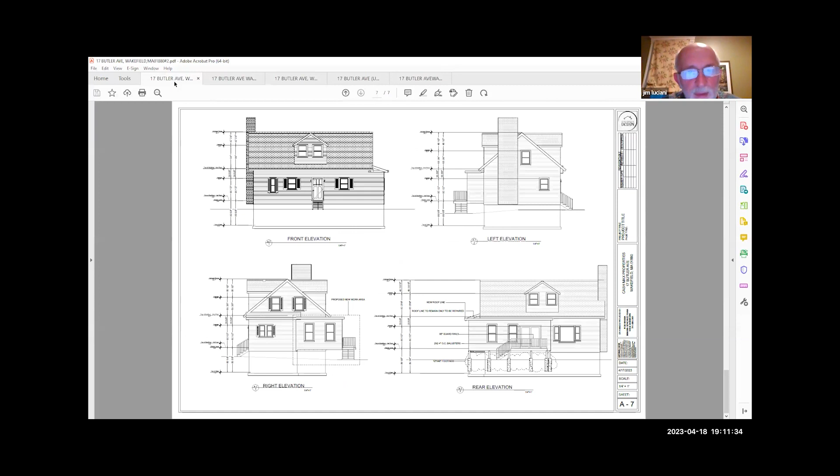Ken, can you go back to that picture you just showed? The profiles, elevations — let me look at that for a second. Okay, thank you.

All right, again, so there is no file number and the applicant is not here at this point. There are no other questions or comments. We can move on. And did the plan show the resource area?

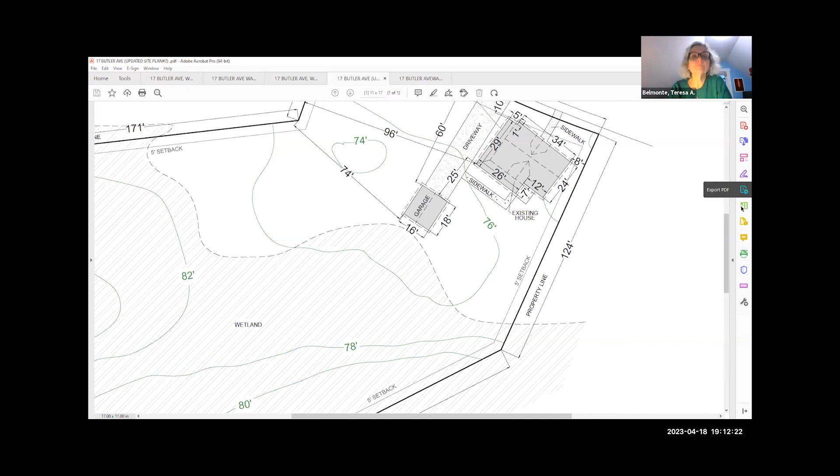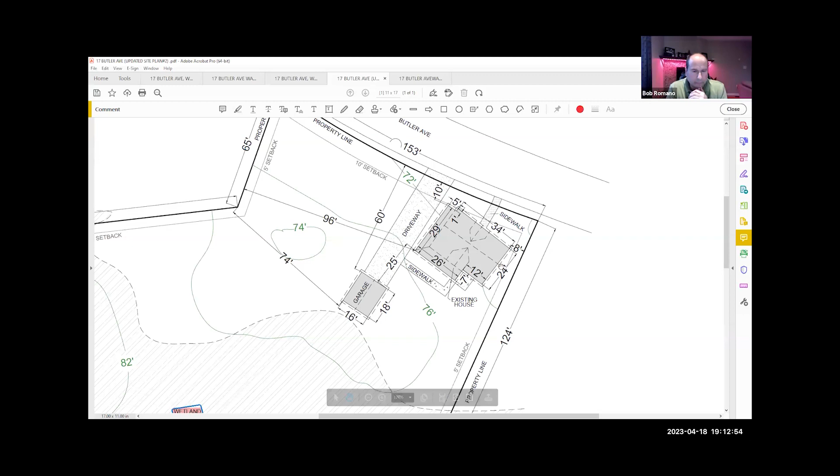Good question. Yes. It's pretty tight to the back of the garage. There is an existing fence that drops off fairly substantially at that point too, behind the garage. Yeah, this lot is quite elevated compared to the two adjacent lots — there's maybe 5 to 6 feet difference in elevation between either side. So there's a noticeable drop off in the back where the wetlands are located. It's pretty easily defined.

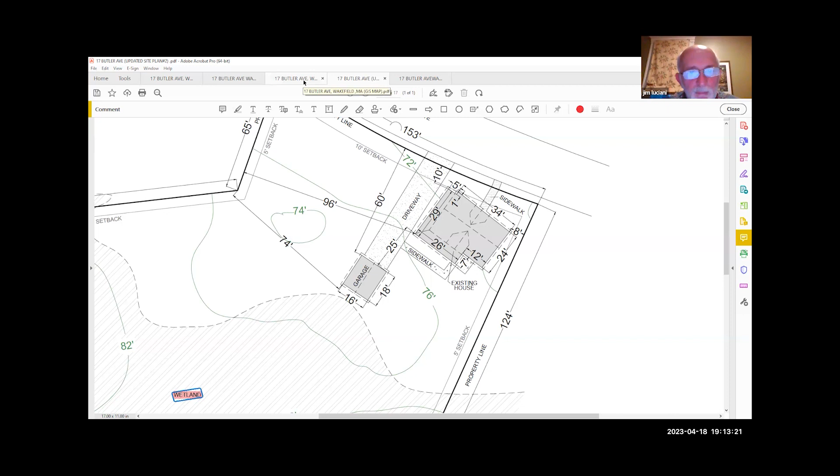Okay. Any other questions regarding 17 Butler Ave?

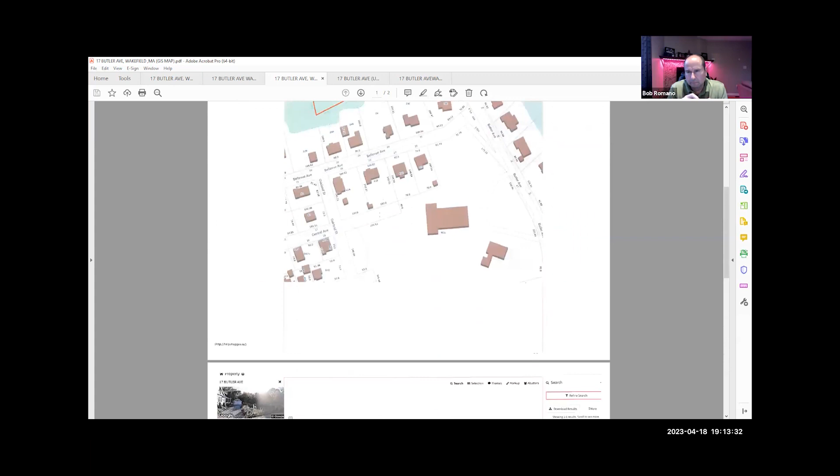Okay, alright. So again, we are waiting for a file number for that.

Alright, next up, we've got about a minute before we can kick off the next thing. Do you want to tackle 51 Eunice tree removal real quick? That should be fast. I submitted a picture to you guys. The tree is within your jurisdiction, but probably somewhere around that 50-foot mark. It's right behind a fence and it's deader than a doornail.

Yeah, what was that address again? I'm looking for the email. 51 Eunice. Ken, do you have that one readily available? Yeah, it's on the screen. Oh sorry, I'm looking through my email for it.

Is there a snag possibility? That was the only photo of it, right Rebecca? Yeah, that's the only photo. It's got multiple trunks. I don't remember looking at it with a snag possibility, but I can certainly revisit that. It's in the woods, so it shouldn't be an eyesore because there's enough stuff growing up about 7 or 8 feet.

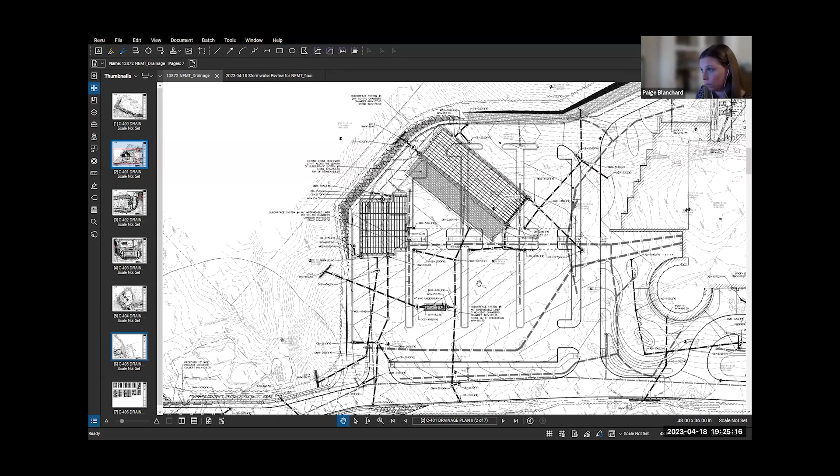So all of the systems still provide the same amount of treatment, which is the water quality structure, and then the isolator row. That is the same approach for both the systems that infiltrate. We've just expanded these systems, so really that's the main change we've been working on with the engineering department. The majority of the rest of the site hasn't changed, so that's really all we wanted to highlight. It's just really that we've worked to reduce all of these volumes to alleviate any concerns.

And I think I can turn it back over to Julie with that.

Thank you, Paige. So the only thing left for us to do, I don't know if the commission members have had the opportunity to see the engineering department's memo from this afternoon, but we're happy to go through that as needed to address any comments further beyond what's in the memo. So if you have any questions specifically, or would you prefer we just proceed through the memo?

Yeah, I don't know that all of us have actually seen that memo yet, so it would be great to go through it. Not sure, would it make sense for Bill to go through those comments? There he is, I am here. Yeah, I could, or Julie, if you want to go through it, if you have it. I don't want to put Bill on the spot, I don't have it in front of me, so you're more than welcome to go ahead of it.

Thanks, we're prepared to do that. And I'd be happy to answer any questions that you have on it, though, for sure. Certainly, feel free to leap in, Bill, as needed. We appreciate that. So Paige, if you have that document, do you want to just go through it and let us know when you have any questions on any particular issues?

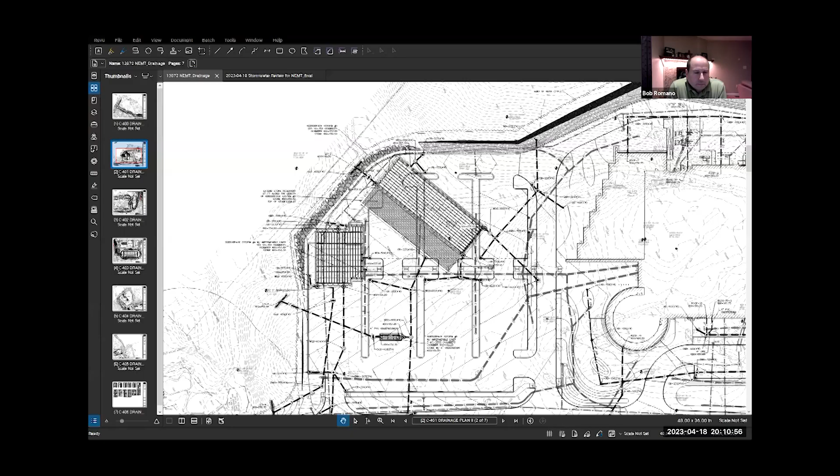Bob? The question I have is, you mentioned earlier in your statement that you were going to mitigate the volume to the discharge area to the town wetlands on town property. Do you have an amount, what the volume is to be discharged now or anticipated what it would be?

Yep, that's all provided in the stormwater report. I don't have those numbers off the top of my head, but we are reducing the volumes and rates. Okay, yeah, but they're in the report. Can I find that report?

Yes, we will. There's a version that should be public right now, but we are based off of this update here for this system. We're going to provide an updated report with those numbers.

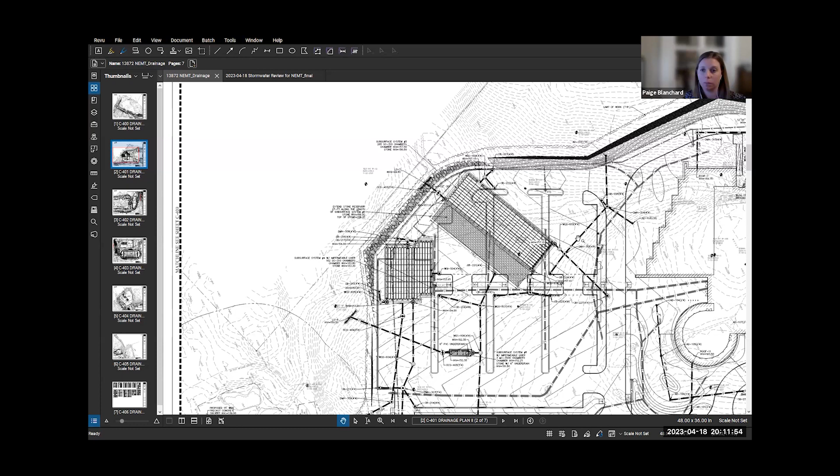Is that the discharge tube that's up there, kind of dark black? Yes, there's two discharges, one here and one here, and they're both going out to town land. Correct. That brings me to another question that Bill Renault, the town engineer, may handle.

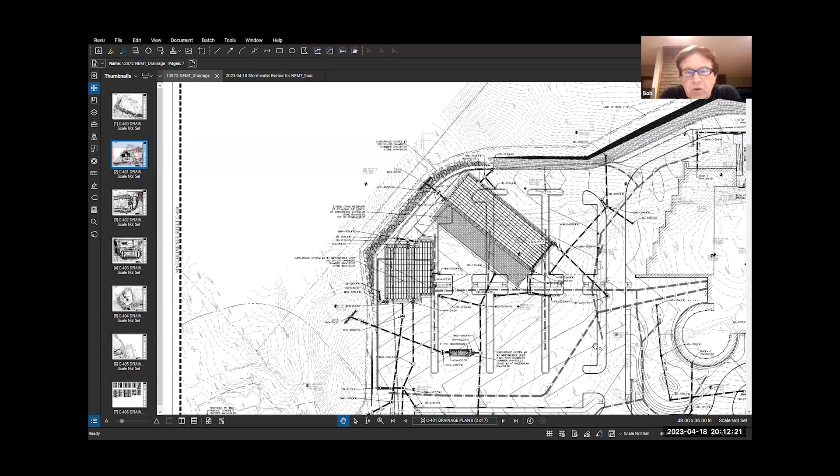He was out in that area with Tim several weeks ago and saw the elevation of my house. Because my house is built on ledge and rock, I'm very concerned about the water that comes out there and could come through my foundation. In the last storm we had 2.5 inches and my sump pump was on for 4.5 days on and off. We know the elevation from the wetlands is higher at my house than my neighbor's, which is directly behind it.

Did you have any comments on that, Bill, or how would that affect things? Yeah, so we had separate analysis points all along the back. We looked at the wetlands that are there, and also at what would go towards Stone Way, so we had them look at all of these different areas.

Originally what they were doing is concentrating all the flow to wetland 1, basically routing it all there. This now spreads it out, but it adds infiltration so that you're overflowing to match what already leaves and goes there today. In my opinion this is a better design, so it mimics the natural flow of water that gets there.

Granted, it's a little bit more concentrated, but it's going to the wetlands, so it would get there anyway. If this wasn't built, it'd be getting there to the same wetland, so it's going to operate the same as it would.

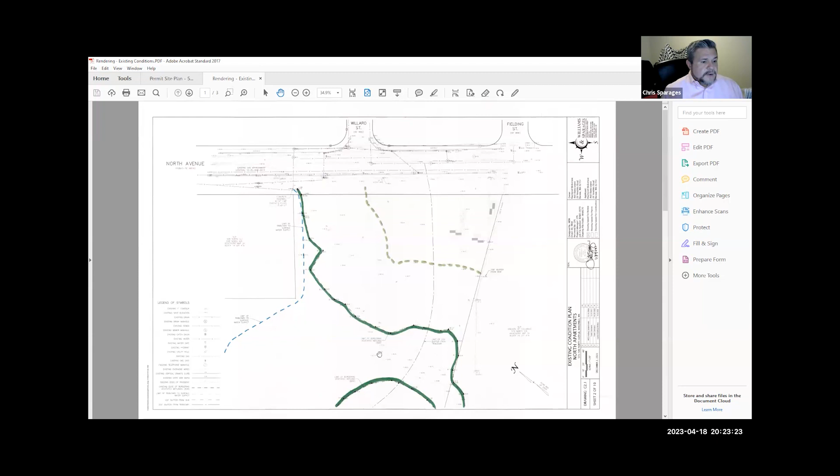We're here before the commission tonight because a portion of our property is located within the buffer zone of a bordering vegetative wetland. Our wetland system borders on a stream that runs through the middle of the property, starting from the southwest area where the MBTA line is located. There's a railroad track and a culvert that discharges at the railroad tracks. This is an intermittent stream that runs through the property and then into a 36-inch corrugated metal pipe right at North Avenue, and then continues on to Lake Quannapowitt.

If we zoom out and show the permit plan set again, you can see Lake Quannapowitt off in the distance. That pipe enters the street drainage system of North Avenue down Willard Street, and then eventually discharges to Lake Quannapowitt.

There were two wetland series, the A series and the B series, and we are not proposing any work on the back part of this property at all. All of our work is proposed within this area here to the northeast.

One of the first things we looked at on the project, we knew there was a stream that ran through the project, and it's been the subject of some questions from Rebecca in the Concom office during our permitting process with the Zoning Board of Appeals.

I'll go into that in a bit more detail, but just so folks are aware, this is a project that was submitted as a comprehensive permit application with the Zoning Board of Appeals. We went through a very thorough review process with all the departments, including the Conservation Department, which definitely had input during the process with the Zoning Board of Appeals.

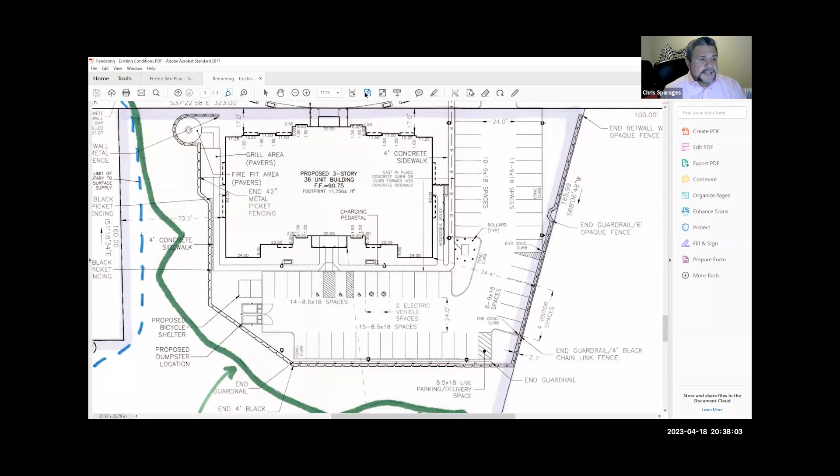They're laid out on our layout plan. We don't have a lot of places for snow storage on the property, just in some of the landscaped areas and this large triangular shaped area near the entrance here. So if it snows pretty heavy and we get a couple of storms in a row, we're looking at taking snow off the site. That was a topic of discussion when we were in front of the ZBA as well.

We have fencing along the perimeter as well. That fencing is for safety and also will do a good job at protecting windblown litter from ending up in the wetland down below.

We also have designed a lighting plan. Having reviewed the other projects during the early stages of this, we tried not to recreate the wheel. We took a look at the orders of condition for 598 and 600 to see the kinds of special conditions that might be important to the commission.

We know that lighting and overspill is something you folks are concerned about. When we design our lighting plans, in this case we have 9 light poles spread throughout the site. We limit the degree Kelvin to 3000, keeping the light color within that warm white range with the LED lights. Once you get close to 4000 and 5000 degree Kelvin, you get that blue light that's not pleasing to the eye, and if it's not pleasing to us, it's also not pleasing to little critters. So we did think about that as we designed it.

I'd say the most important aspect of the project we designed is the stormwater management system, and it's fairly simple. We're collecting stormwater runoff in the parking field in a couple of catch basins and a trench drain along North Ave. Any rainwater that touches the pavement will go through either the trench drain or the 2 catch basins and then run through one of 2 pre-treatment devices. These are proprietary treatment devices we've designed to make sure we get more than 44% TSS removal before ultimate discharge to our main BMP.

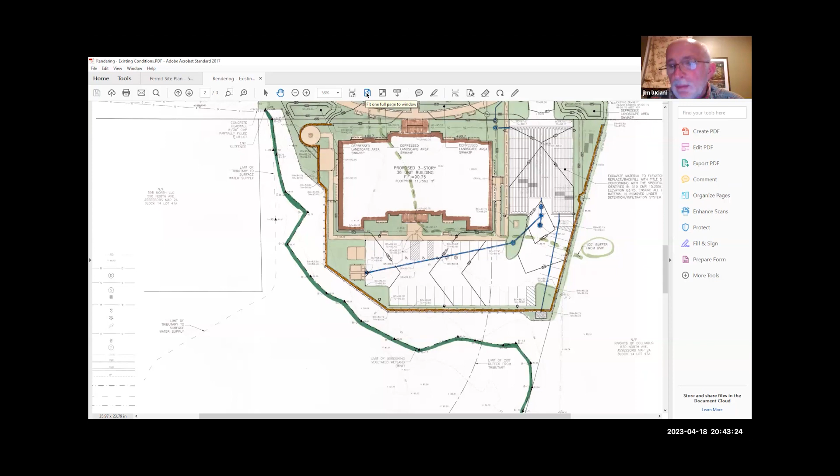Sure, let me go to this plan here. So this is the thread, this will be the thread of the stream, and we did locate a bank, but it all lies within the wetland area, so we didn't show it on the plan. It's all inside the wetland line. Okay, so in other words, there's no bank outside the wetland line. Right.

But is there a width to the channel that is the stream? So there is. It's very much underwater during certain times of the year. This is a very big wetland area.

Let me stop sharing for a second. I have another screen that I can show you that does a good job of showing that, so you can get a feel for it. It won't take very long. Let me share my screen again.

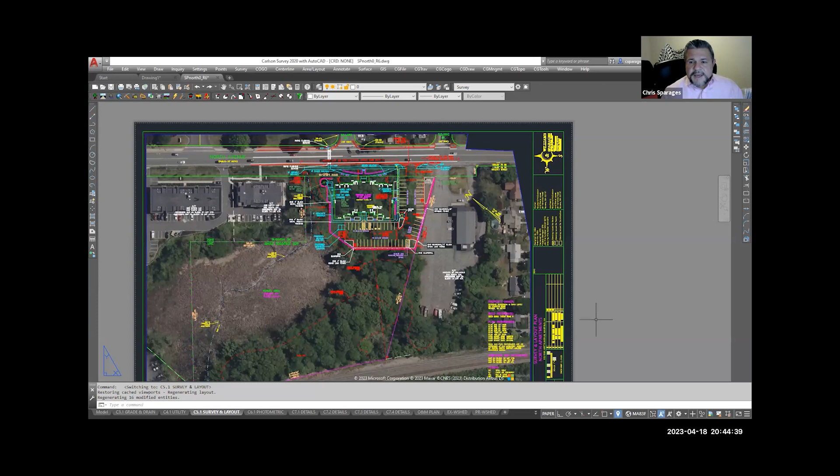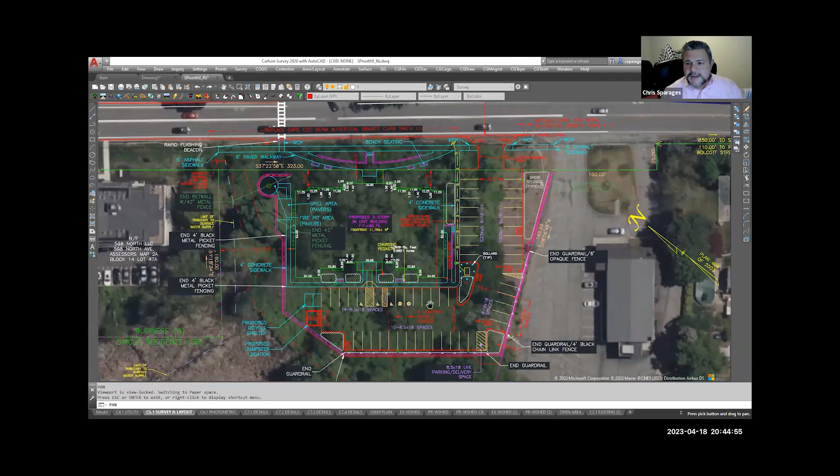Can everybody see this screen? Yes. So this is my CAD program. It's unusual to see these things in different colors, but you can see the building here is in this green color, and the parking field is here, and this is an accurate, current aerial overlay.

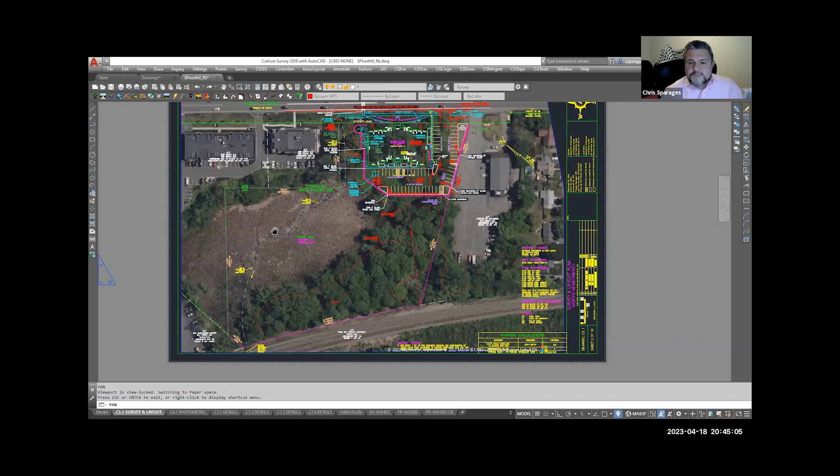You can see the stream, how it comes out of that pipe underneath the MBTA tracks and comes through the property, and you can see the thread. So Jim, there definitely is a width to that, but you can't really get out here.

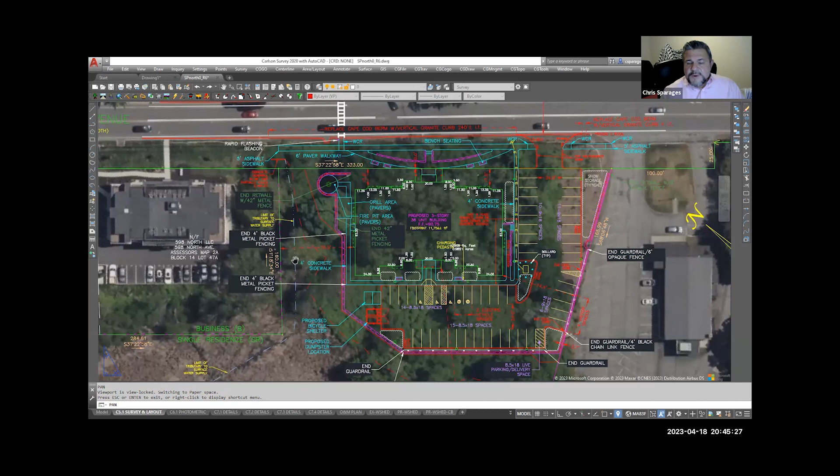I was more interested in the area between the two buildings. I see. So we do have some bank flags on our side, but we didn't bother getting the other side. I know the plan for 598, which I think I have a copy of, does show it on that side.

But we didn't bother showing it on the plan because the wetland is uphill a bit. Okay, let me finish up quickly here, going back to the plan. So the other item Rebecca really had a lot of questions and comments on had to do with how close we're proposing this project to the wetland edge.

We recognize that the commission has a policy, the tree removal policy, and the 25-foot policy. We asked for waivers from both of those local requirements when we applied for our comprehensive permit. Those waivers were granted by the zoning board of appeals, in their capacity as the approving authority for the comp permit. But we do have some areas where we're less than 25.

We try to do our best. Out in this area here, we do a good job of staying more than 25, but once we start coming around here, we get as close as 15 feet. We chose that as our limit based on the previous approval for the 598 project right next door. They had some similar areas where the commission was willing to allow activity as close as 15.

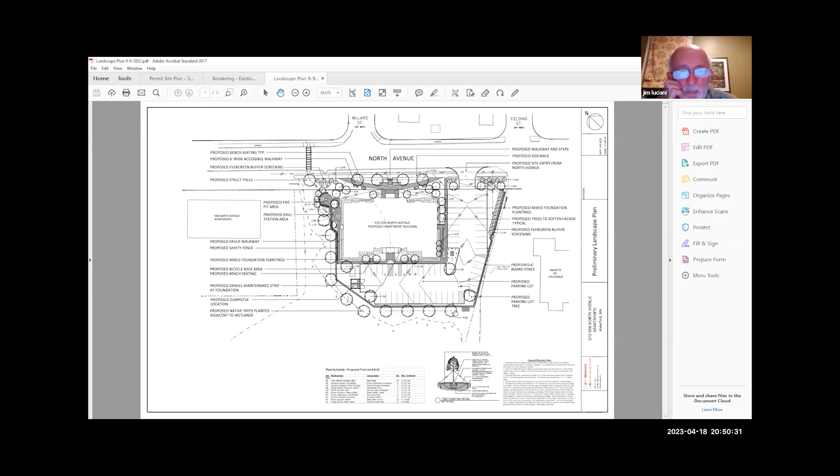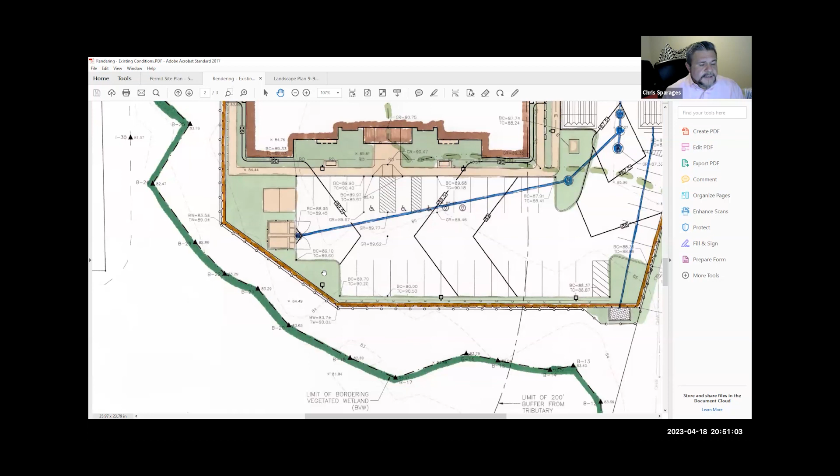What's the elevation difference between the wetland and your parking lot? That's a good question, let's zoom in and take a look. Wetland flag elevations down here are roughly elevation 83 to 84, right in that range. And then up on top, it's a little bit of a sloping thing, 89, 88. So about 6 feet or so.

So the closest point to the wetland is approximately 15 feet, but your actual limit of work line is going to be somewhat closer than that. Are you talking about the silt fence line or the trees we'd like to plant? Okay, so the fence is identified, I see it. So that's where I'm measuring my setbacks to.

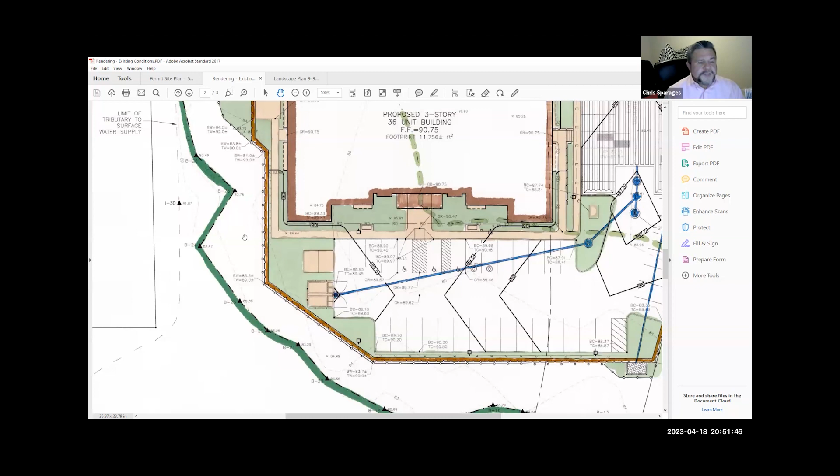What was that circular structure up by the upper left-hand side? A fire pit. That's correct.

Could you put the 25-foot buffer zone on the plan as well? Yes. I would say throughout. Yeah, exactly.

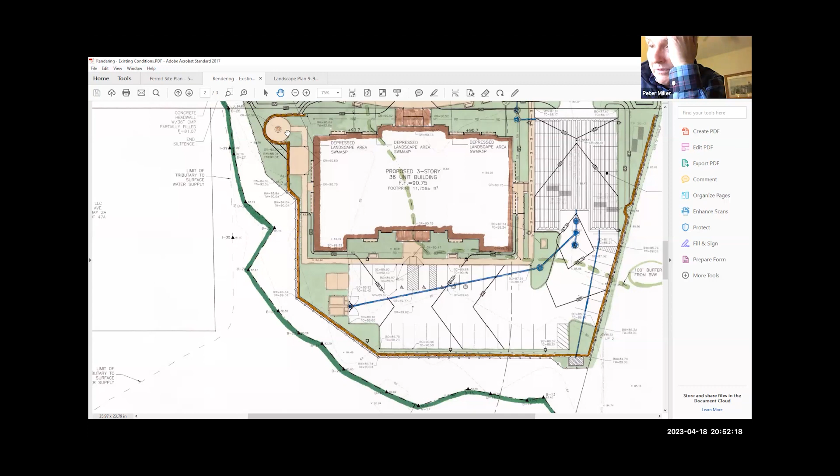And does this mean there is no ANRAD? That's something we would have to evaluate, right? We would have to. Yes, we've asked the commission as part of the notice of intent to confirm the wetland line as shown on the plan, so we would need to do that as an initial matter.

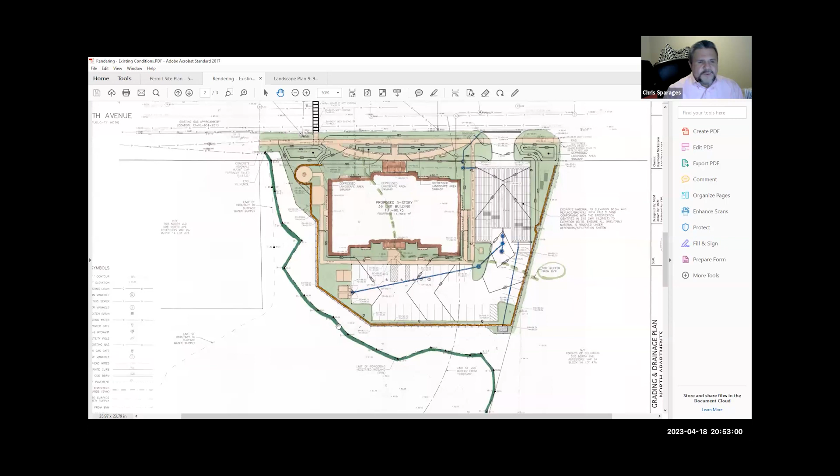Normally we would come in with an ANRAD, but this one, it always works out this way, right? This one's so straightforward. Greg Hockmuth from our office flagged this wetland, it's a toe slope wetland. I asked Greg what he thought, should we go in for an ANRAD? The stream doesn't even show on the USGS map, and the wetland's pretty straightforward. He said he wouldn't bother on this one. And wouldn't you know it, this ended up being a really controversial thing with the stream and everything like that, so we probably should have come in.

And has Elaine or Rebecca gone out to confirm the wetland mapping? No, we haven't been out yet. Hasn't Elaine been out? I thought Elaine went out. Well, I think she went out on the other project, didn't she? Actually, a number of us went out on the other project, but we did walk part of this property at the same time, we tried to, but it was very difficult. Was it flagged? One side was definitely flagged.

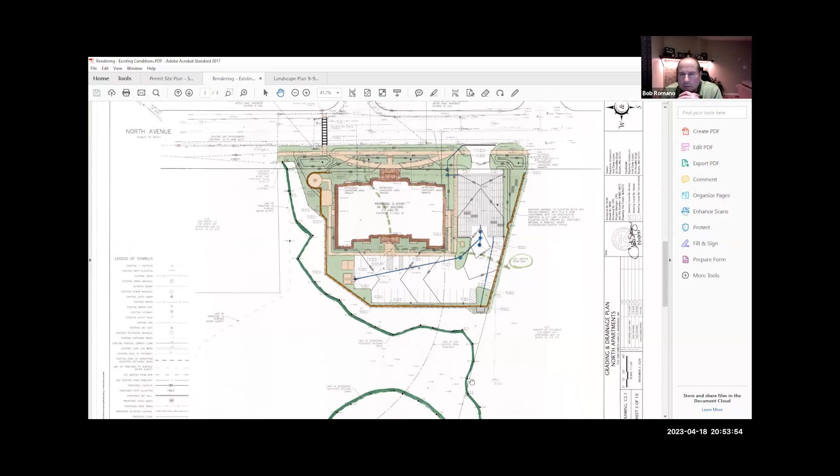Yeah, so what we've done, Mr. Chairman, is it's been a while since the flags were up, so I had one of our field crews come out and refresh the flags along here. When was the original flagging done, do you know? Yes, we have that in the notice of intent, let me just take a quick peek here.

And I do recall the knotweed was very difficult to get through. We had a hard time finding a path. I'm going to have to get back to you on the flagging.

This is where we discussed the flagging here, and then the inland bank flag. I don't have that in the application, so I'll find out for you. But we definitely updated the flags, refreshed them based on our survey locations, probably a week or so ago.

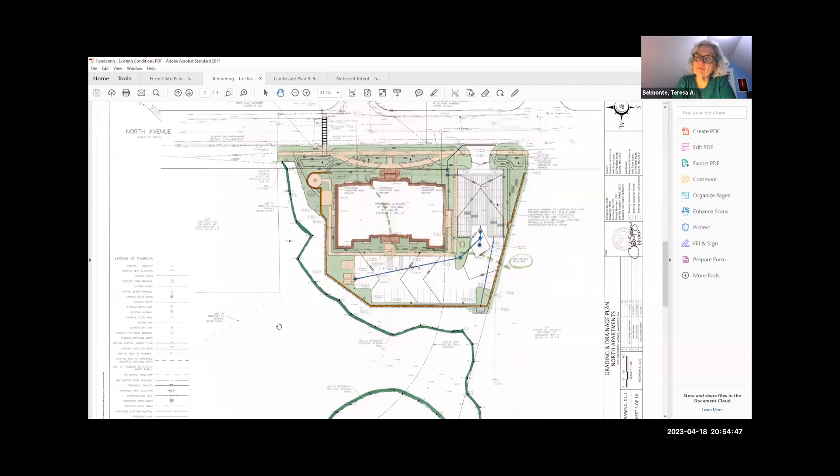This came before us with the prior plan, right? If you were going to build single family houses and get a zoning change, right? Mr. Lopez is on the line. Dana, would you like to explain what that previous project was?

That's the site visit we took, I think. We parked in the K of C lot and walked into this site from the K of C. It was a much smaller project. It involved a rezoning, if I remember correctly, which was not successful. That's right, unfortunately. We were originally going for 6 townhouses.

Getting the residence changed to general residence from single family, and it got denied in the public vote. So rather than that, we just didn't think it was an appropriate place to build a single family home with the wetlands behind, the 2 buildings aside of it, and the Knights of Columbus. It just didn't make any sense. The property had basically no value at that point for a single family. So this was the route we chose to go.

And that's how we got to this point on that. Mr. Chairman, for the record, that was Dana Lopez, property owner. All right, thank you.

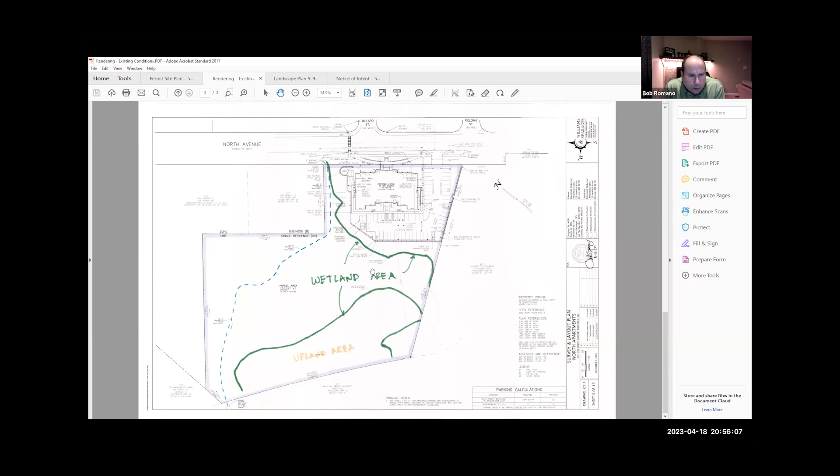Any further questions from the commission tonight regarding this? Obviously, there are some things we do want to talk to engineering about, the stream in particular and the watershed. So can I just confirm, you made the choice not to have a buffer zone of 25 feet, because you could have just moved the whole thing over. Again, I'm just confirming that.

I'll be very honest with you. If we did honor the 25-foot, then we couldn't have built, we couldn't have supported the parking that we would need for the building, which means the building would have to get smaller, the porch would have to get smaller. Okay, thank you for your honesty. I appreciate that.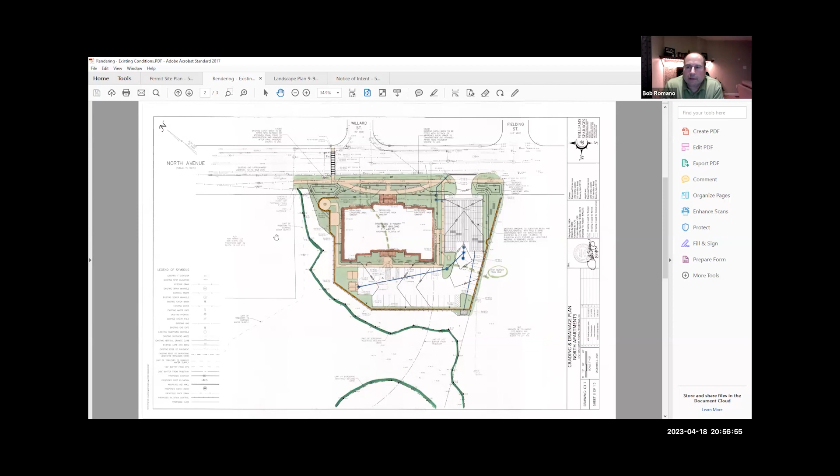Any other questions from the commission tonight regarding this? Would we want to go out soon to take a look before everything gets too overgrown? It's still tough to look myself. A few of us have already done this when it was previously presented to us. As I mentioned, we parked at the KSC, walked in through there, and there was a lot of knotweed. It was tough getting through even to the stream.

But sure, anybody who hasn't been out is certainly welcome to do so. We have a pretty good feel for the site, so we're happy to guide everyone around. I wouldn't be opposed to taking a look at it because last time we didn't really get very far, couldn't see anything. Is there a place to walk, Chris?

Right now, we should plan on going out soon. I don't know if I'll be around this weekend at this point, but would this Saturday work for those who want to go out? I want to go, but can Peter not do the morning? I can only do the afternoon on Saturday, unfortunately. And Sunday's going to rain. I'm not around this weekend, but by all means, go without me.

Well, Jim or Ken, would Saturday afternoon work? I wouldn't be around until 11:30, 12. So Teresa couldn't do the morning either, so afternoon would work for her. Yeah, but not until about 2 or 3.

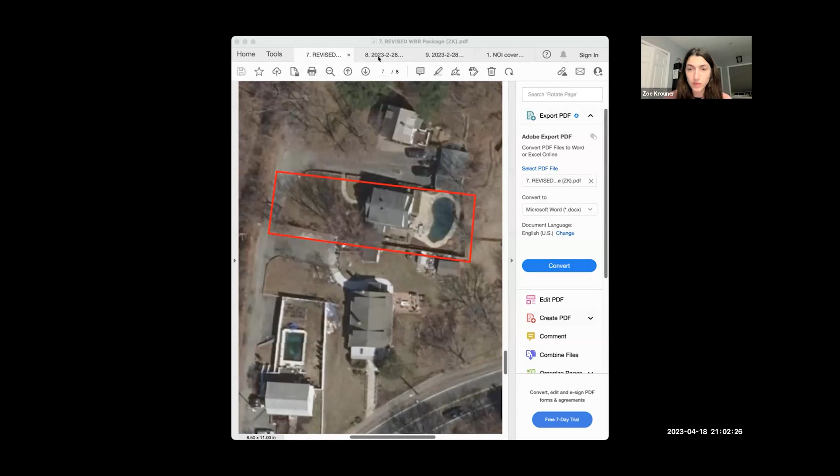Starting with the locus site on an ortho photo, we have the single family house, driveway, walkway, deck, shed, pool with associated patio, fence, and lawn space. On the existing conditions plan, the front portion of the property is mostly lawn space with a walkway, house in the center rear, with the deck and shed on the south side, and the pool with associated patio in the back. Across the street on Harrison Lane is the perennial stream, which casts a 200-foot riverfront area onto the entirety of the site.

Now looking at the proposed site plan, the applicant proposes to remove the existing deck and shed located south of the house and replace it with an addition. The location of the addition and porch was designed to utilize the existing degraded area. There is also a proposed porch located on the east side of the house. There is a tree located in front of the house where the existing shed is, right where my mouse is, that is also proposed to be removed during construction.

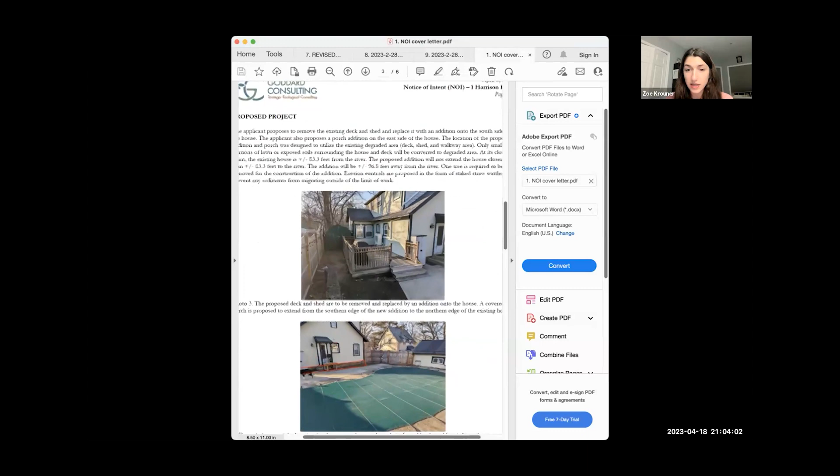I also want to note that there is a dry well proposed as a form of mitigation in the front lawn, which is not shown in the plan but will be added and submitted to the commission. I'm just going to show a picture of the deck and shed I'm referring to - that's what's proposed to be removed and replaced with an addition. And then the east side of the house, utilizing the stairway and a little bit of exposed soil for a porch.

Now I'm just going to briefly go over some of the performance standards. The existing degraded area on site is already exceeding the 10% of degraded area in riverfront. The project does increase the degraded area by a small amount. So although stormwater management is not required for single family houses under the Wetlands Protection Act, we believe the dry well is a great way to manage stormwater from the degraded surfaces on site and overall improve the existing conditions.

For performance standards C through D, proposed work is not located closer to the river. For E, since the lot is entirely within riverfront and the existing degraded area on site exceeds 10%, the project does require restoration or mitigation. To meet this standard, mitigation has been proposed in the form of a dry well to capture stormwater runoff. The mitigation is proposed as an equivalent level of environmental protection where square footage is not a relevant measure. That wraps up my presentation, and I'm happy to answer any questions.

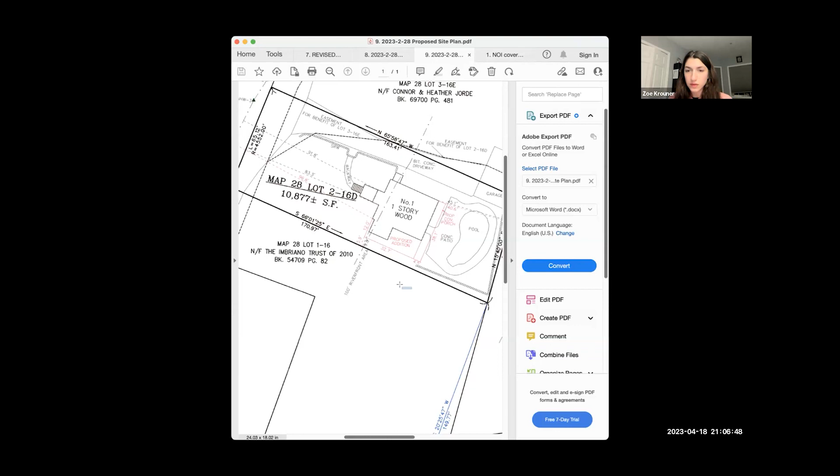Okay, and is that addition going to be on a full foundation, frost wall, or piers or what? No, full basement or just a frost wall? Just one moment, I can confirm that. I'm actually not entirely sure.

Can I ask, have you gotten zoning relief for this? I'm sorry, what was that? Has the ZBA approved this plan? Do you need zoning relief? I would need to confirm that, need to double check. I think you do, and I also think it's probably a non-conforming lot. Oh, actually the lawyer is in the process of doing that right now. So you don't know whether or not you'll get ZBA approval for this. Okay, yeah.

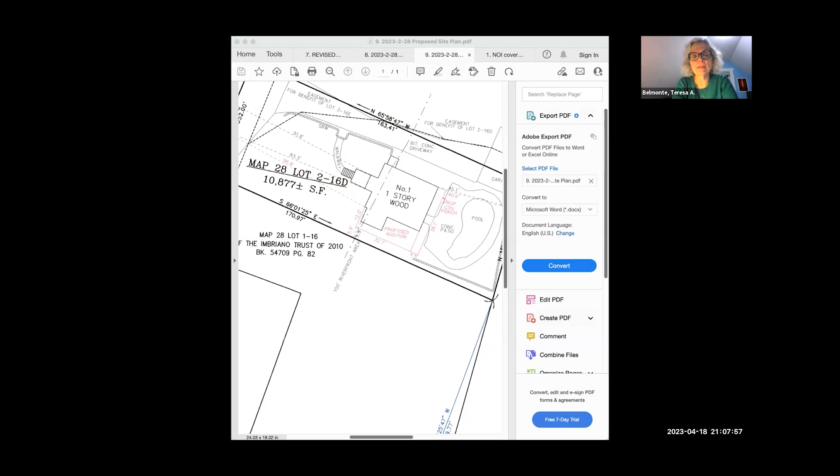Yeah, it looks like it's less than 6 feet from the property line on the side. I don't know what the minimum side setback is for this area. There's a table on one of the figures in the corner, the zoning table. Usually it's 15 feet. Yep, there it is. Okay, required 15, existing 9.8, proposed 5.9.

So yes, to answer your question, Teresa, they would require that. Yeah, it's a non-conforming lot also.

Oh yeah, so I believe we're aiming to get the ZBA approval at the same time as the Conservation Commission approval.

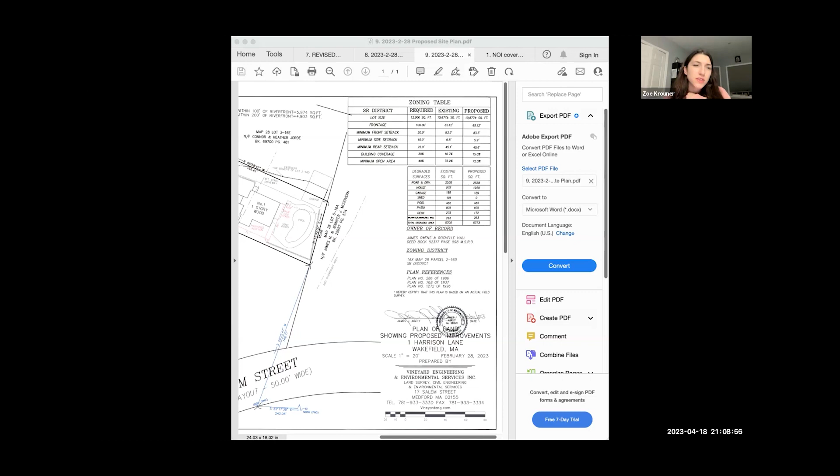And Zoe, did you say if that's going to have a full basement or just a frost wall? I don't have that answer right now, but I can confirm that and get back to you. Does that house currently have a basement, full basement?

Trying to see. I'm not sure, but I can confirm. I believe the applicant is present.

Yes, hi, hi Zoe, this is Rochelle. Hi, I'm Rochelle, trying to put my daughter to bed at the same time as half listening. But yes, to confirm, yes, the house has a basement, a full basement.

Okay, the new addition being proposed will have a crawl space, so it will not have a full basement. Okay, thank you.

Do you have a sump pump right now in your full basement? We have an ejector, and yes, I believe we do have a sump pump too. I'll have to confirm that with my husband, but I know we have an ejector.

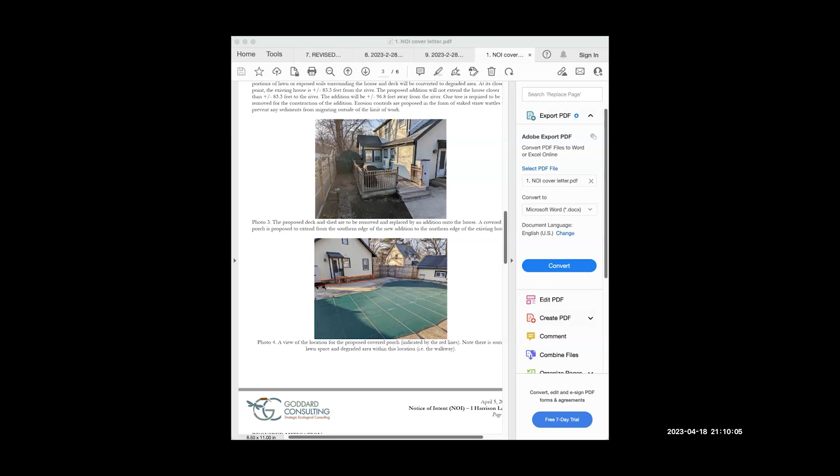Yeah, I know that area tends to be a little low and there's a lot of water in that area. Well, we are up on a hill. I don't know if, yeah, the grading, I think there was some grading added to one of the plans. Okay, our basement has never flooded. The reason we have an ejector is because there's a half bath in the basement, and you gotta pump up to the main sanitary line. Yeah, exactly, makes sense. Okay, thank you.

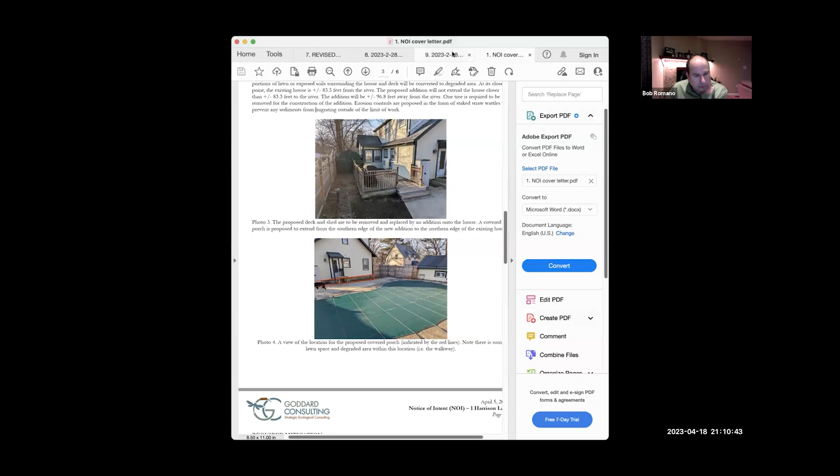Zoe, Bob, would there be proposed downspouts coming off the addition and/or porch? I was going to say, Bob, that's a covered porch, so you could probably put the runoff for that into the dry well as well. Right.

Yeah, the dry well discussion has just sort of started within the last few weeks, so we're sort of learning about that as well. We're happy to commit to any mitigation features, but I don't really understand what size we'll need or where exactly it will go, given the size of the covered porch and location of the addition. But I think we definitely have room for it in the front.

And you are correct also in the fact that we have filed with the ZBA, and I think we're going to be on the agenda maybe the next meeting, so hopefully we'll learn more from them. It's my understanding we won't need a full variance, or hopefully not.

We're going to hopefully have a finding for the setback. Okay, thank you. Yeah, you'd want to get that water away from the house and into a dry well, just to keep it away from your foundation. I understand there are different sizes though, like 50 gallons up to 500 gallons. Right, it can be sized based on the amount of roof area you're trying to store water from, and what type of storm event you're trying to store the water for. But yeah, the important thing is to get it away from the foundation.

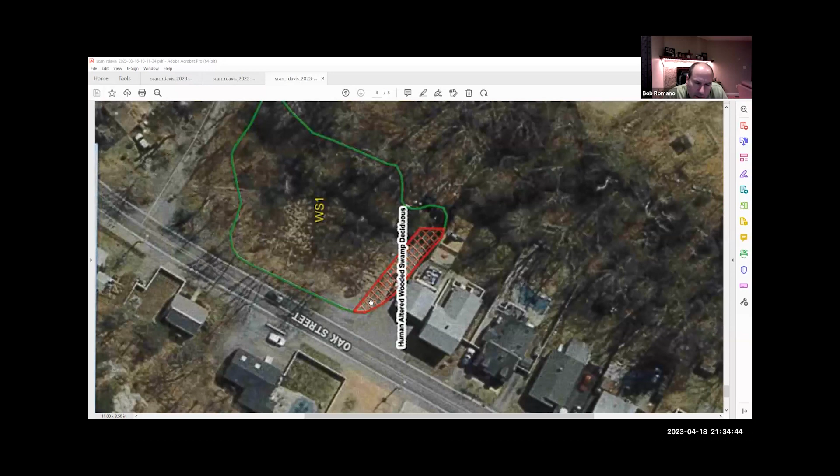I didn't realize this was gonna be a Zoom meeting. I have multiple pictures from years and years ago, before the addition was done, showing that it's always been an open area all the way through there.

Is that where the town looked at? Did the town put the crushed stone in that red hatched area? Correct. There's always been access all the way back there, so they would have access if they ever had to dredge that out. Supposedly, that's the reason why they did it.

Rebecca, is DEP thinking that it's recently altered? They didn't say one way or the other.

I do have the plan from the town, and the crushed stone was only supposed to go on that corner. If you look where the word oak is right now and follow the K to where it meets the red, that little triangle right there is where the crushed stone was supposed to go.

We're kind of in a valley, basically, so all the water that comes across the street literally comes across there. Where the S is on the street, there's a pipe that got rerouted from the street that used to go next to the garage. It got rerouted in there, and there's all crushed stone and all the water.

In the middle, where the bigger tree is, down to the left is where the pipe comes through, and all that stone was getting washed in. The pipe does not protrude out very much, so it kept washing and washing down, and I had to keep going in there with my big hip boots during storms, shoveling it out.

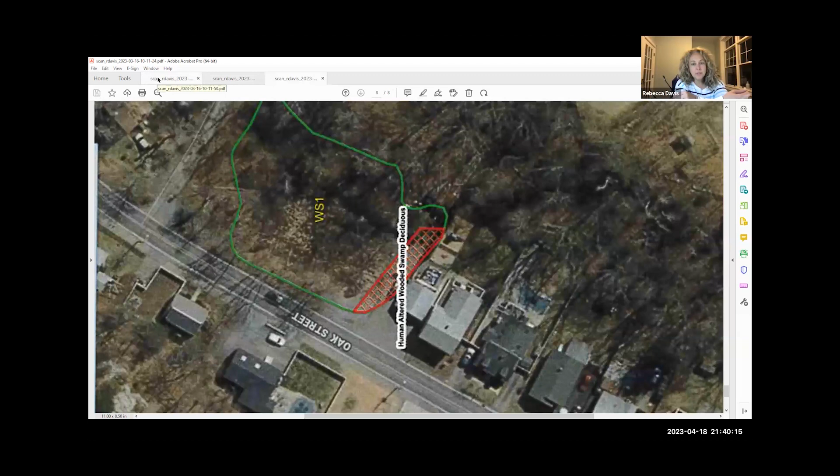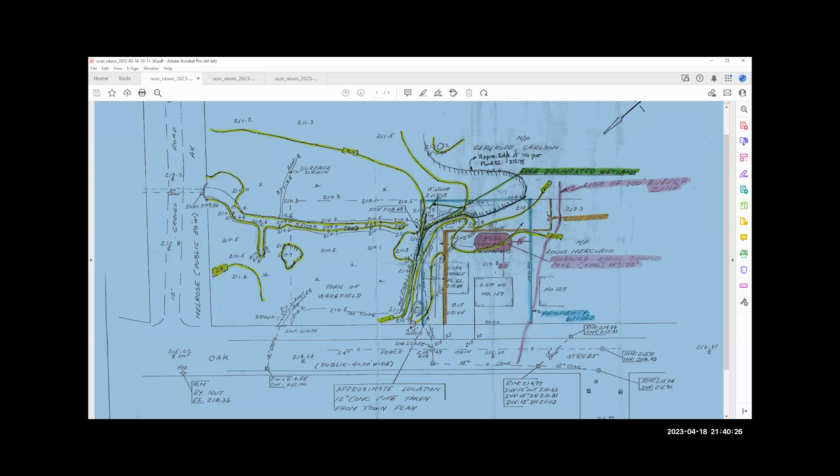I didn't have any other plans. That's all right, I'm just sorry. If you put the lot line over, I think the lot line, if you look at this one, is in blue. Yeah, blue, correct. Let me look, I'm gonna pull it up on mine. I wish I could share it with you, but it's just the town assessors maps.

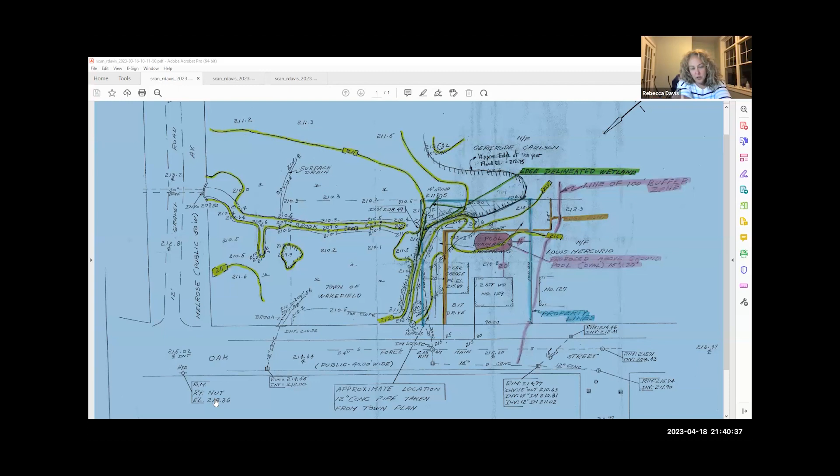The play structure goes beyond the lot lines. I know you said that you were judging it by some of the other stuff. So I'll have to take a look at that.

Since I was a kid, it's always been my yard that my father's mowed and maintained. If you look across all the abutting 6 houses, they all have sheds, and there's a rock wall that's probably been there forever. That's kind of the unofficial end of your yard, even though I might not officially own it. But that structure, we could get 4 people and move it over. It's not a permanent structure, the playset. That we could move if necessary.

I mean, like I said, it's a tough street. We have kids, and unfortunately they can't go out and play on the driveway or drive their bikes in the road because it's a busy street. So we did move the playset. I didn't realize it was not on my official land.

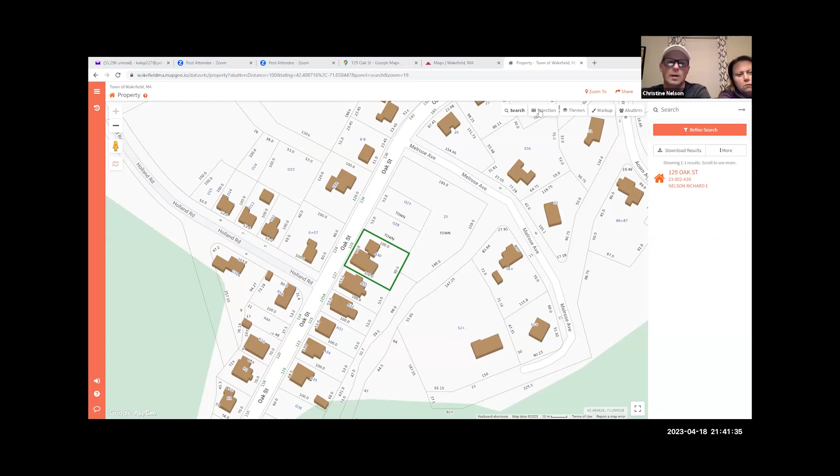Right, and as I look on the maps, yes, I see what you're saying about some of the sheds. Correct. Well, I don't think they even show on these. There's all sheds towards the very back of the lot lines. Yeah, there you go, you might be able to see. Can you zoom in on that? I think almost every house has a shed in the back.

That might be. Can you zoom in on it? Part of it is, and it's funny because it splits right behind your lot. So part of it is conservation land, and then the next piece down behind some of your neighbors is Board of Selectmen land. I'm not sure what the difference is, I know what conservation is, but I'm not sure what that Selectmen one is. This one says town right here. Yeah, and that one's Conservation Commission. They're different.

Okay. So where do we stand? The shed may be too far over, but we don't know if it's a miscommunication, or there's just always been a structure there. The top, I think, blew down in a storm, and it's just on a wooden platform with a plastic shed on top, not a permanent structure on a cement platform or anything like that. It's just a wooden structure that could be moved if necessary. But like I said, a lot of the other sheds across the backyards are even further back. It's literally almost touching the back of my garage. So that may need to be moved based on what we're saying here. We'd have to take a look at it, but as far as the other part, the DEP, it sounds like it may be a miscommunication.

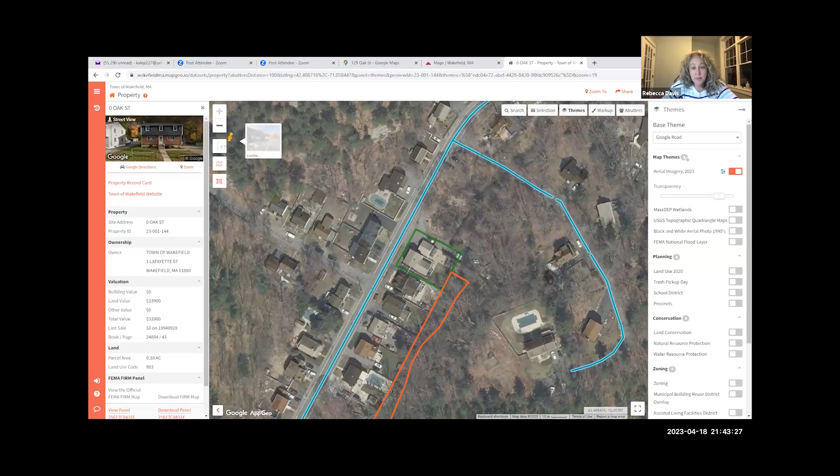Rebecca, what do you think? I think I want to see the pictures. I hope he has pictures. Yeah, we do need pictures, that would be really helpful. We haven't cut any trees down or anything like that, just the little driveway extension, but that was more to save the rocks from going down and blocking that pipe. And the shed's been there, I believe, since before I bought the house.

So if you could send the pictures over to Rebecca, we could take a look at them, and if need be, she can take a visit over there and hopefully clear this up. Absolutely, I can provide any pictures you need. Yeah, that'd be great. Why don't we plan on chatting about this again at the next meeting based on whatever we see in the pictures, and then we'll clear it up one way or the other. Sounds good, that works. The next meeting is May 2nd. All right, thank you both, have a good night.

All right. Rebecca, I don't have anything else on this agenda, but do you have anything else? I don't really have anything else other than, what was I going to say, the open space survey. Yeah, I did go through it and I did send some comments back, and Judy did respond back. I don't know if everybody else had a chance to look at it and provide any actual feedback. The survey is live now.